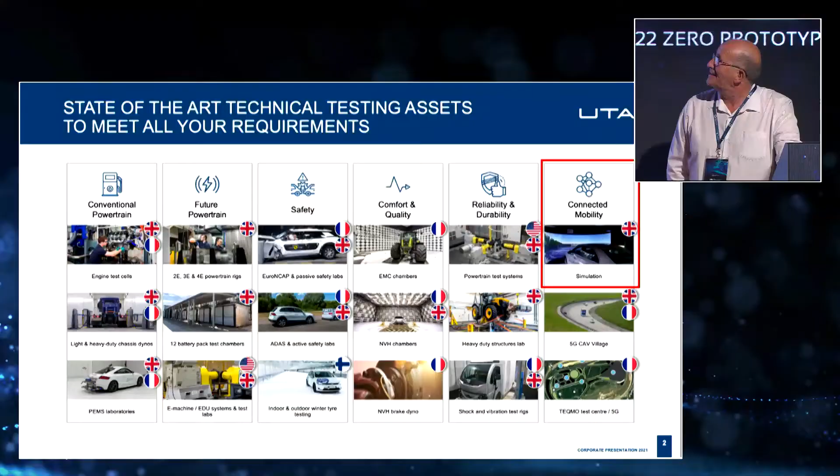The obligatory corporate slides. So about a year ago, UTAC Ceram in France merged with Millbrook in the UK to become UTAC. And typically we work across all the traditional verticals: conventional, future powertrain, safety, comfort, quality, reliability, durability, and connected mobility, which is where my particular focus is, in simulation, in 5G, and in novel test centers.

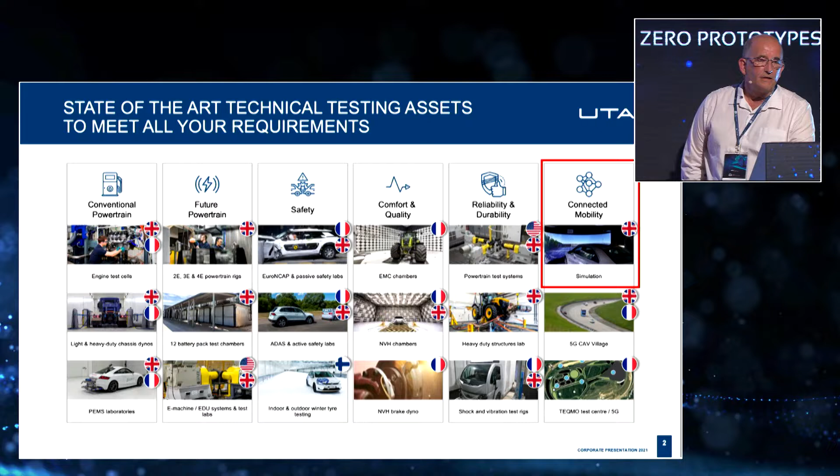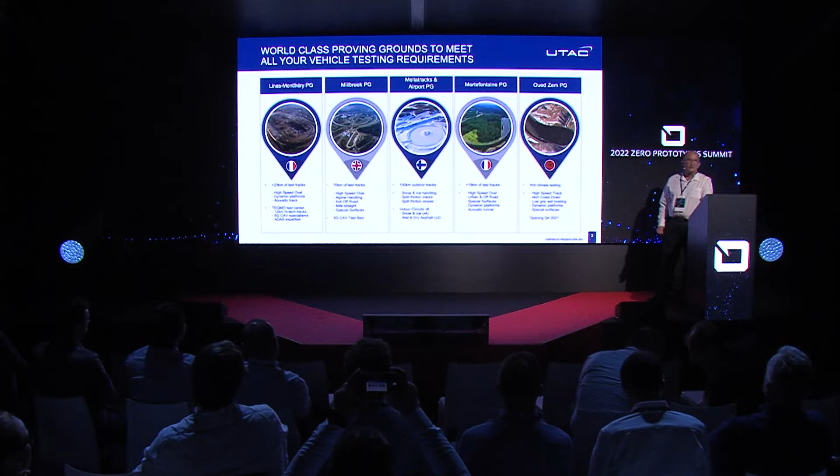Not one, not two, but 5 proving grounds now fall under the UTAC umbrella. So in France, we have Montlhéry, which is based on a traditional oval racetrack from 1925. We have Millbrook in the UK. In Finland, we have Test World, and a special hello to our tyre customers. Mortefontaine in France, and just opened Oued Zem in Morocco, which gives us a whole range from cold through temperate through to hot climates. So this is just kicking off right now.

At UTAC Millbrook, we decided some time ago that we would not just be one product, one software. We had to be independent and impartial and offer our customers a wide range of choice in all of the software packages and the capabilities that we could put together as an independent test center. So we have a range of dynamic simulation, environment simulations, sensors, traffic, connectivity, which is really interesting, control systems, perceptions, and test and data management.

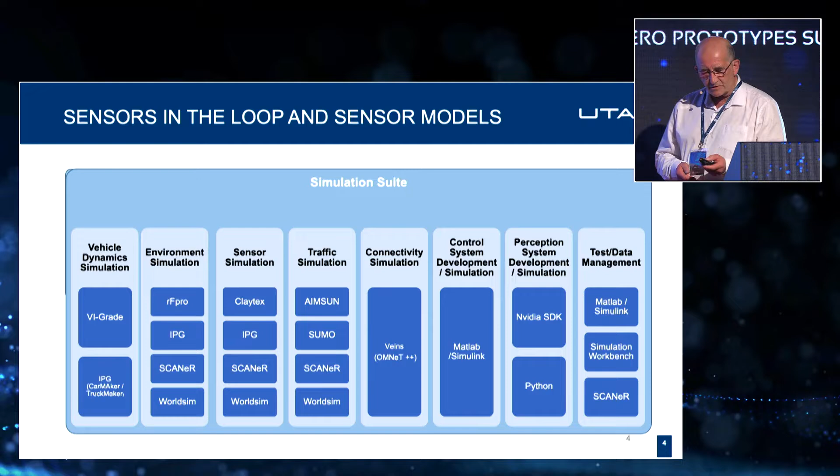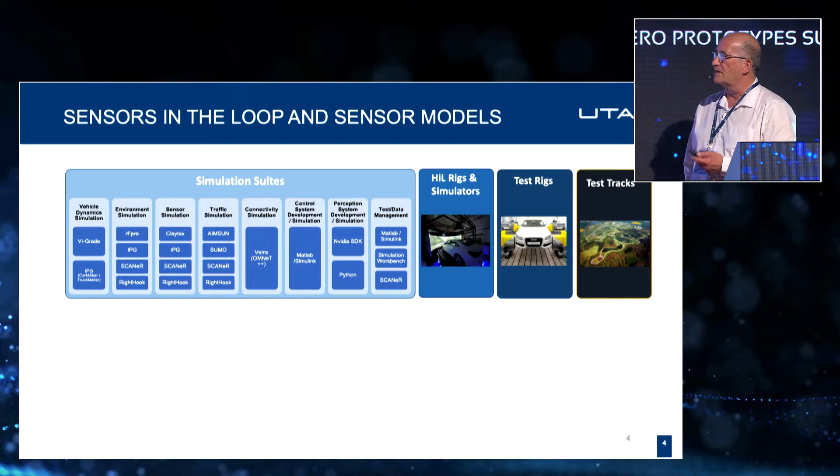All of this we put together, as Bob has just said, through some HIL rigs and simulators, through our propulsion test rigs, and also now, due to our private 5G network, we can actually interact in real time with vehicles on the tracks. We have a series of infrastructure that goes with that: software, hardware, data center, and so on, and it is all linked together by a data-centric middleware.

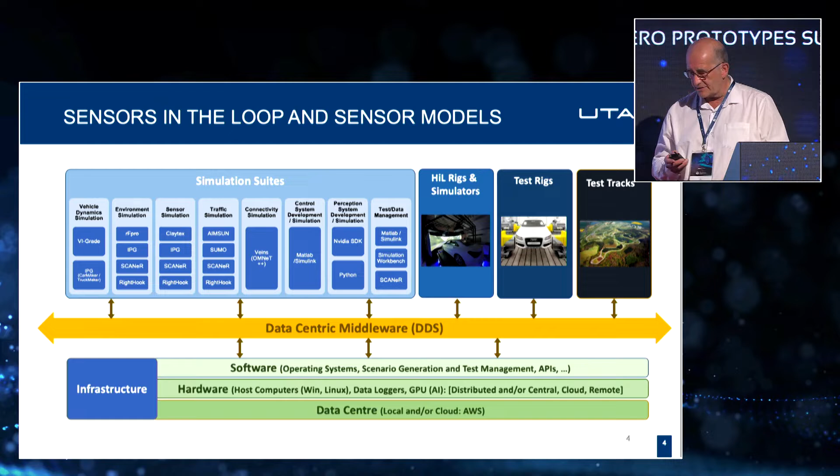So everything plugs in to this data bus. And essentially, all the inputs and outputs are data-centric. We're not exchanging huge, heavy models that utilize a lot of bandwidth. We're exchanging just very basic inputs and outputs to get this to work as a connected ecosystem.

So again, we have the VI-Grade compact simulator we've had for a number of years now. Really good. We have a static vehicle-in-the-loop simulator with projection and a whole different suite of software integration. VIL. We facilitate it using our 5G network. So in the vehicle, we have an IMU. That's it. We don't have rigs. We don't have software running. We actually have a real-time connection back to the simulation lab. So actual vehicle setup for VIL is really quite quick to interoperate between vehicles. And this is going to become really important in the future, rather than spending 2 days kitting out a vehicle with a lot of instrumentation.

So I'm going to talk about a project that was supported by the UK government, bearing in mind this was just a 20-week project, which we ran as a collaboration of different test beds in the UK, different entities. And the whole idea was, can we establish a flexible, integrated framework, demonstrate integrated capabilities, so not just discrete simulators, link them all together, start aligning with a test customer, and showcase how bringing it all together can be made interoperable, and how it's much better than one single facility.

So the whole idea was to look at customers on one side, whether they be tier ones, universities, small mediums, startups, run through a kind of UK connected automobility services, a simulation as a service center, and also interlink with each of the test beds that we have in the UK. UK because it's government supported.

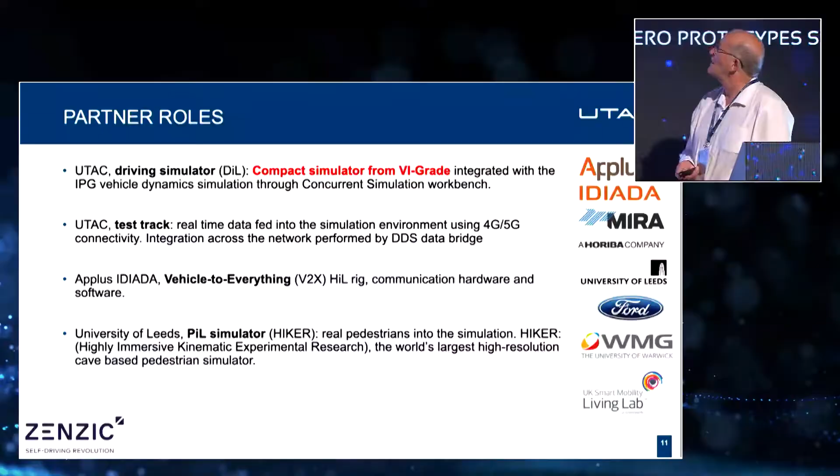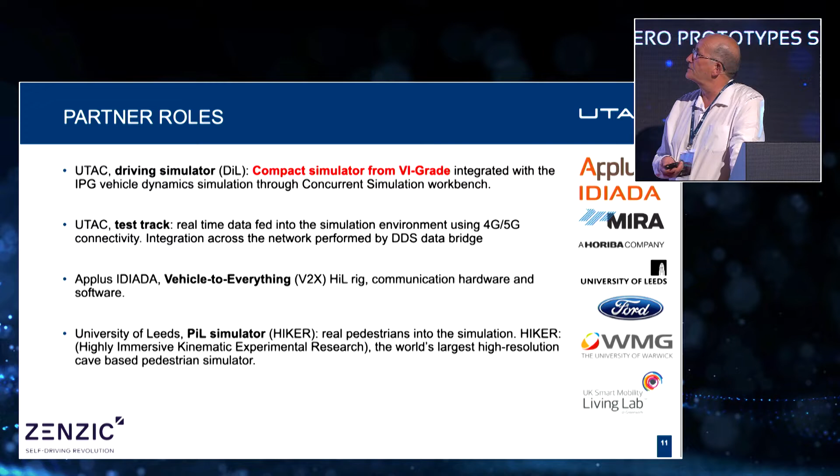So for us, we used our driving simulator from VI Grade, integrated that with IPG through concurrent sim workbench. On the tracks, we used real-time data fed into the simulation environment using our 4G, 5G connectivity, and we integrated it through a DDS data bridge. At IDIADA, they brought in their V2X HiL rig in Cambridge in the UK. So looking at real radio hardware to broadcast V2X messages.

And the University of Leeds, which I'll come on to, they have a great pedestrian in the loop simulator, which is called Hiker, which is the world's largest high-resolution cave-based pedestrian simulator. Ford Motor Company brought the VIL vehicle, and that was integrated with IPG CarMaker, so we had an XPAC HiL system inside the vehicle, we had access to the ECUs, the camera box, we had access to the Simulink models for each of the control systems within the vehicle as well.

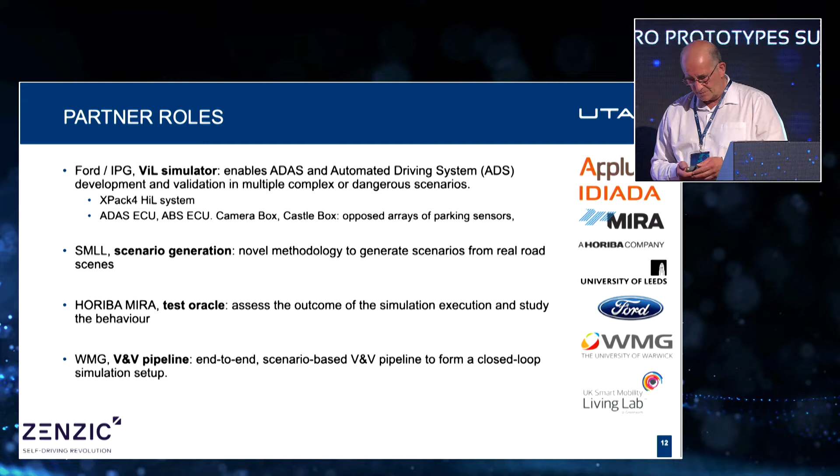Smart Mobility Living Lab in London provided scenario generation, a really interesting methodology to generate scenarios from real CCTV scenes. MIRA producing a test oracle to look at the outcome of the simulation, to rate it, study the behavior, suggest further improvements. And WMG in University of Warwick to look at a V&V pipeline. So again, can we look at how we can verify and validate the simulation that we're doing to the real world? We looked at 3 different use cases.

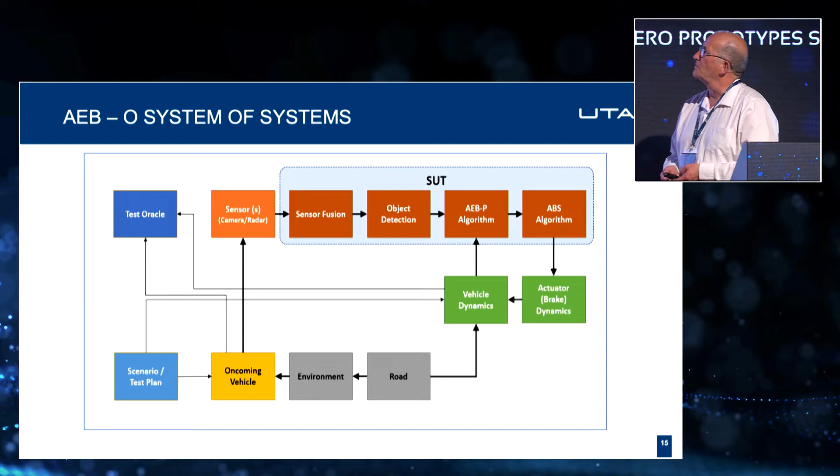So AEB oncoming, latest Euro NCAP 2022 protocols for AEB head-on. Can we break it down to a system of systems rather than just look at it in one big lump? Of course. So you have road, environment, the oncoming vehicle, the sensors, the fusion, the object detection, which forms the system under test. And again, working with algorithms and actuators.

We looked at EEBL, Emergency Electronic Brake Light Warning System. So can we produce a real signal from a real vehicle, send it through simulation, and work across a piece of hardware a few tens of kilometers away? So again, looking at forward vehicles, the interfering vehicle as well coming between the subjects, can we energize that? The one just to focus on was an AEB pedestrian, autonomous emergency braking. Again, breaking it down into a system of systems.

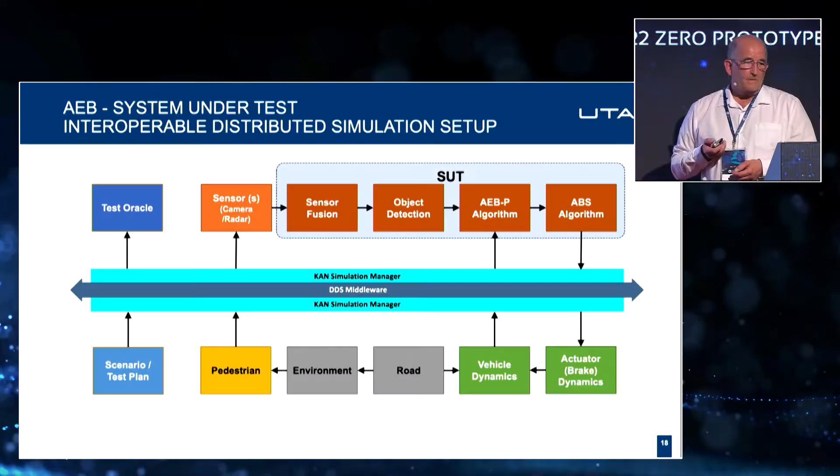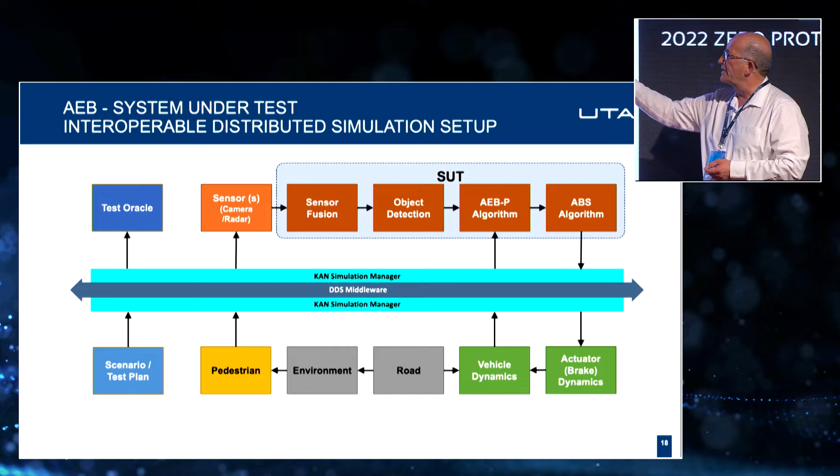If I take it further, putting it into the interoperable distributed simulation setup, then we would use the actuator in a HiL rig, the vehicle dynamics in the model, road, environment, a model pedestrian, or maybe even a real pedestrian, we'll come on to that, and the system under test, but all running together in real time using this DDS middleware database. It allows us to do model in the loop with exactly the same systemic breakdown. So your Simulink models that actually run each of the control systems within the vehicle, running it through with a dynamics model, onto the road, the environment, and the pedestrian.

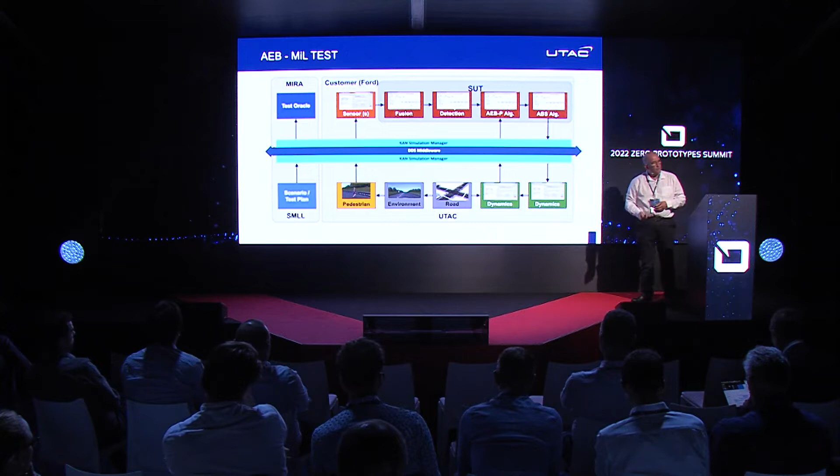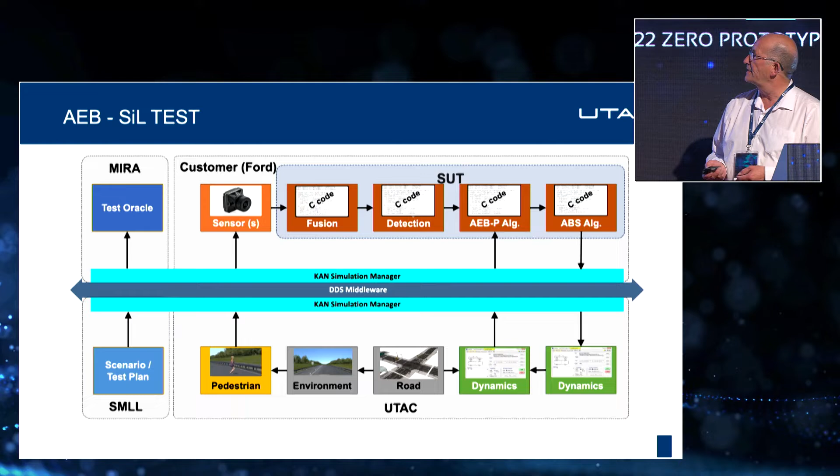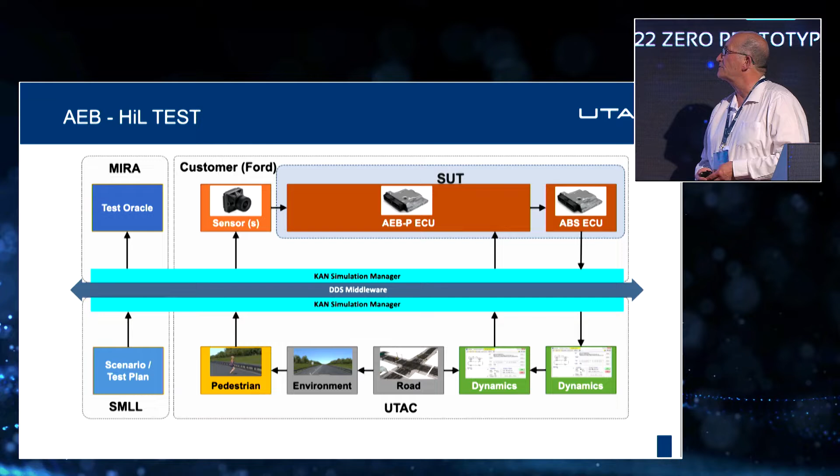Go a little further and bring the software in the loop system. We can either use a real camera, we can use the C code that actually generates what goes on inside the ECUs, and again, link in with the dynamics. So a lot of this you can swap in and out really quickly. Go forward into HiL, so we can bring in the ECUs, we can put a camera in a box. This particular vehicle was camera-only sensor, so we didn't have to go through radar, bearing in mind we only had 20 weeks, and radar's difficult.

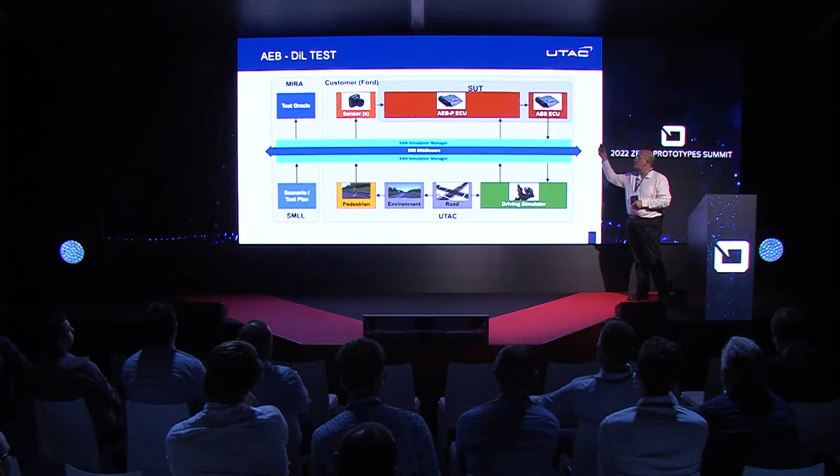We can also bring in the driver in the loop, and again, bringing in the driving simulator into the system, running through all of this, again, in real time. And eventually the vehicle in the loop. So put the vehicle on the track, get it linked with a 4G, 5G gateway to report the position back in real time into the simulation, and more importantly, send that position somewhere else.

And the whole issues that we had to work through was the connectivity side, the data storage, the management, the security. One enemy of low latency is encryption, and it's a complete nightmare. How do we do that in a trusted way? Work out the access level management, and also try and work out what additional processing capacity we're going to need to do this. So this is what we had to do. This is what we integrated together.

So you can see the geography on the left, the whole list of different things. So some of it bespoke, some of it commercial off the shelf, some of it open source. So simulators, the RF Pro environment, the IPG CarMaker, SUMO we use for traffic, Aimsun, PTV, vSim, the Hiker Lab in Leeds, the V2X system, vSim, SCOOT, which is the real-time traffic light system operating in London.

The scenario generator, we'd brought everything into OpenSCENARIO so we could make it work. A bespoke test oracle, a bespoke V&V loop, and Safety Pool, which is the database for scenarios at Warwick University. So all of this we integrated together.

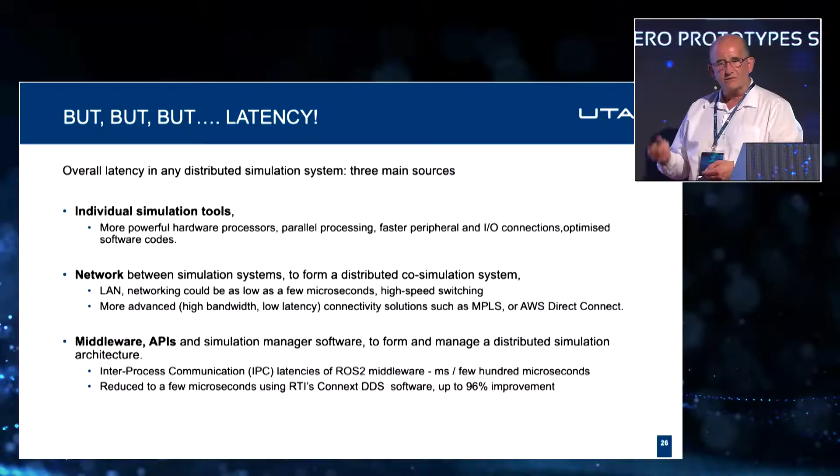Low latency. It's already been discussed, so I'll skip over this slide. But you know, everybody says, but latency. It's three elements: the individual simulation tools, the network between, as Bob spoke about, and the middleware. And obviously, you've also got refresh rates of projectors, of graphics systems, of renders, and so on.

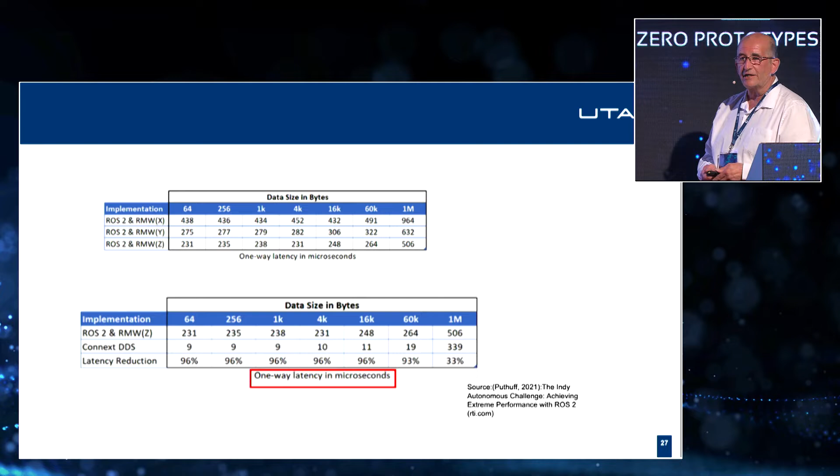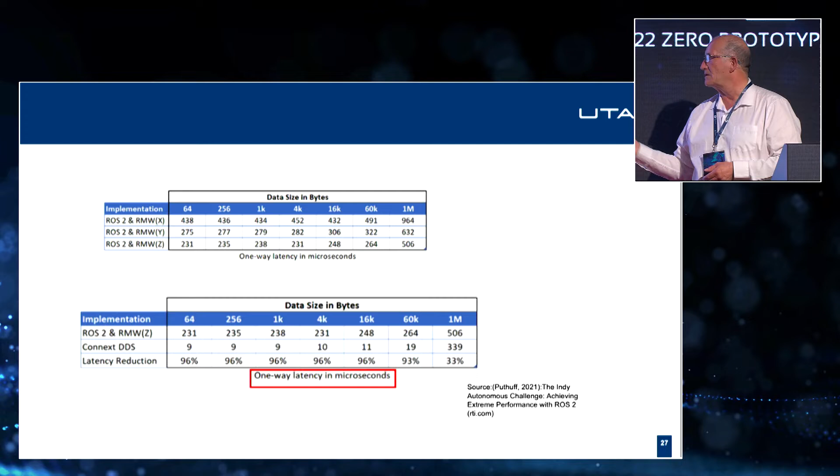One of the interesting ones that I did find when we talked about this is something that was done in the US recently. If you remember the autonomous IndyCar challenge, where they were racing autonomous vehicles at racing speed, they were looking with the DDS middleware getting down to around about 19 microseconds. So no longer do they talk about milliseconds, we're now talking microseconds, which is really quite interesting if, as you say, we need to stretch the geographies and stretch the links.

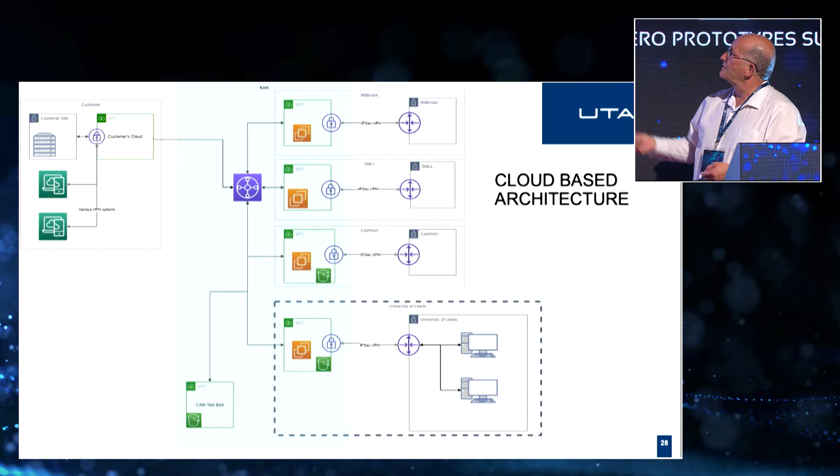So for us, it was using a cloud-based architecture, all based around an Amazon backbone. So each particular site had its own IPsec VPN tunnel into their own virtual private cloud. That then linked to the Amazon backbone, and that was sent around the system. So we can connect together Millbrook, London, CAV, the University of Leeds, and run straight through into the customer's cloud as well.

So the outcome. This is a great thing by Smart Mobility Living Lab, which looked at CCTV cameras characterizing all the actors and actually generating in real time a scenario that can be outputted and sent around each of the test beds. Initially, we could do it through Unity and Scala, but it enables us to then convert it into OpenSCENARIO and run it through the simulation. So this one's particularly picking up an AEB scenario, and later on it does an EEBL.

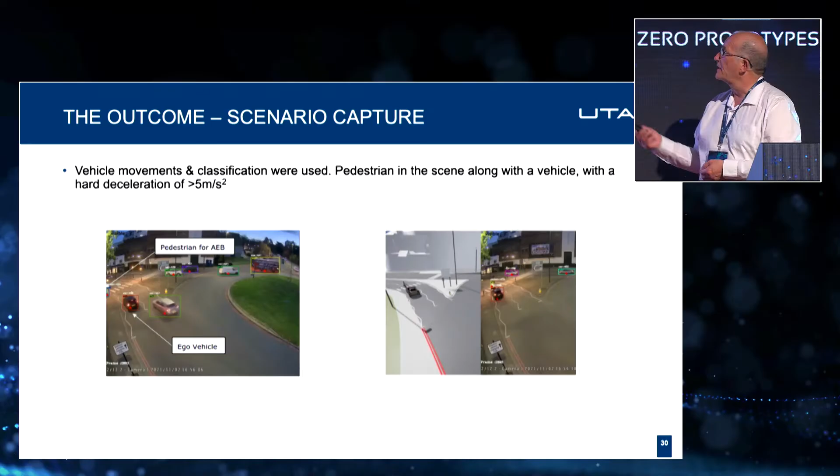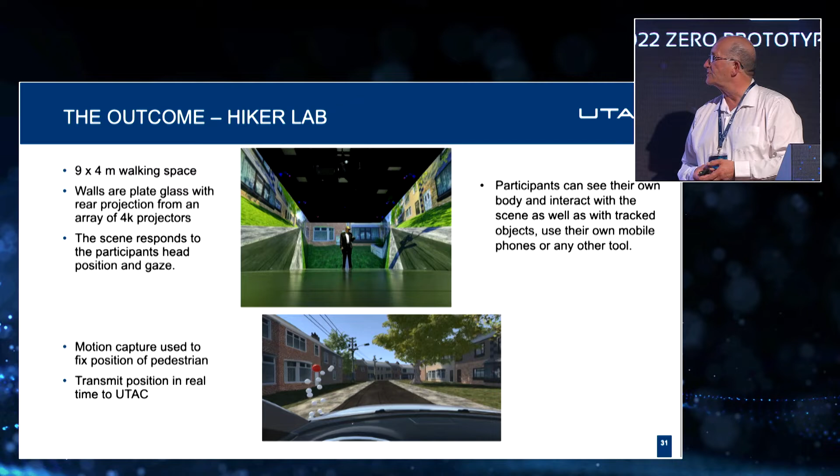In the University of Leeds, they have the HIKER Lab, which is a 9 by 4 meter walking space, glass walls with 4K back projection, and the user wears a very light headset so they can see their own body and interact with the scene as well. And they use motion capture so we can pick up the joints of the pedestrian and produce a model. Actually what we were doing is transmitting the position of the model into the simulation at Millbrook, not the whole 3D rendering of the pedestrian.

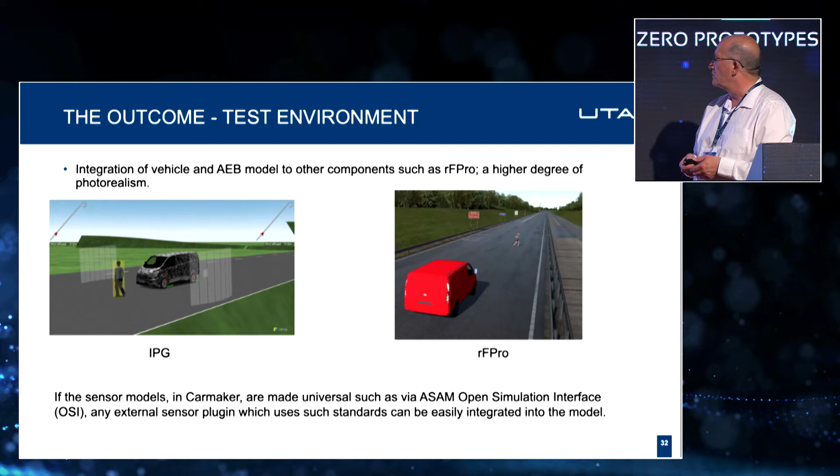The test environment, we integrated the vehicle with the AEB model, initially in IPG. For more photorealism, we used rFpro for this particular project. But also there's a great opportunity to integrate more things into Open Simulation Interface so we can actually grow this ecosystem even more.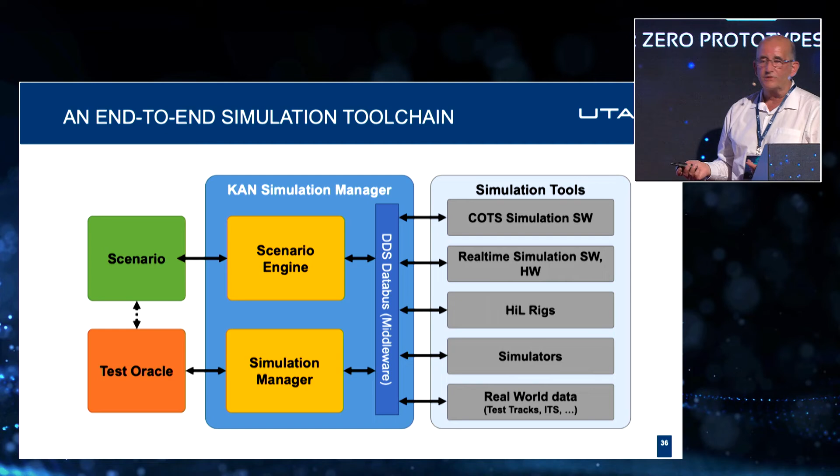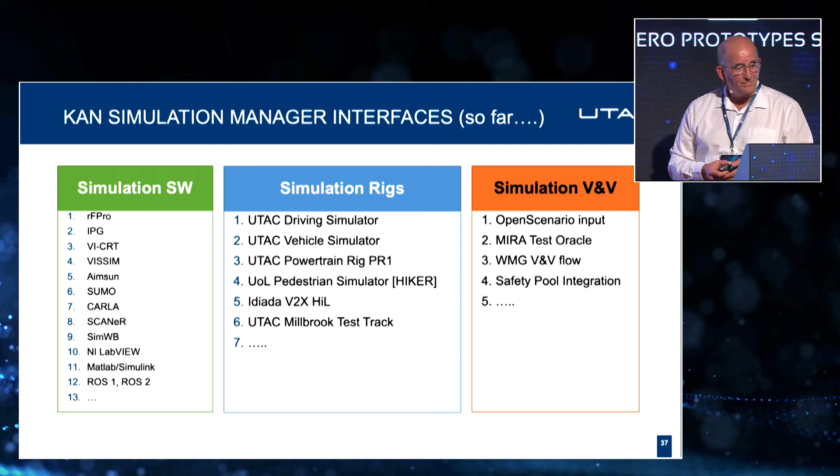So the whole thing is to put together an end-to-end tool chain which brings in commercial off-the-shelf simulation software, real-time software and hardware, HIL rigs, simulators, real-world data, run through a scenario engine and a simulation manager to give an output. So far, we have integrated the software on the left. We've integrated the rigs that you see in the center and the V&V tool chains on the right. So if you'd like to add to that list, please come and see me afterwards.

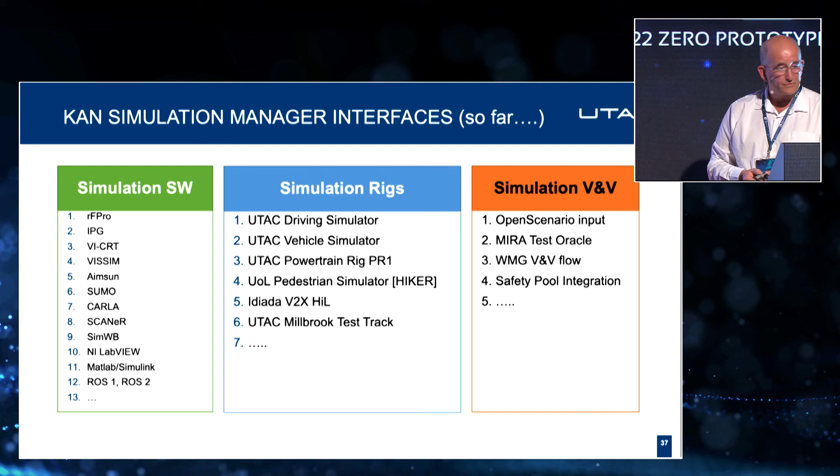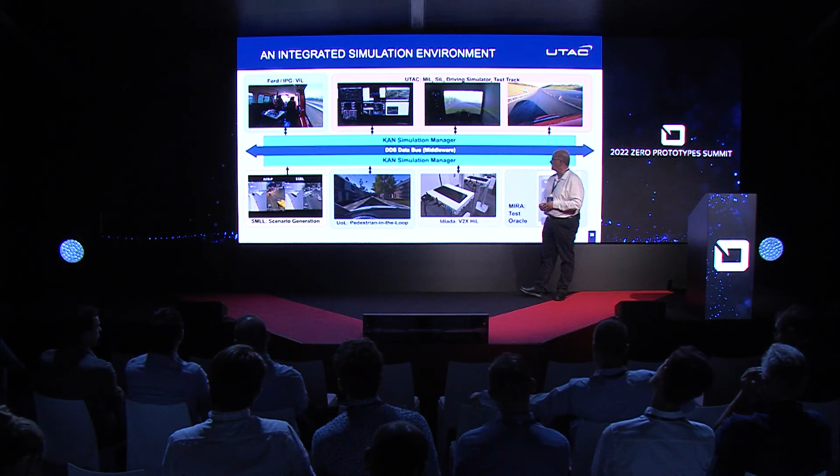And just to put it all together, we have the vehicle in the loop rig running, the simulation room, the driving simulator, the vehicle on the track, the real-time capture of AEB and EEBL scenarios from CCTV, the waving pedestrian model, and actually running across the V2X HIL rig to pick up the EEBL warning and energize the V2X system. All of it runs through the test oracle to do the analysis, the results, and the recommendations. So that's a very quick run through.